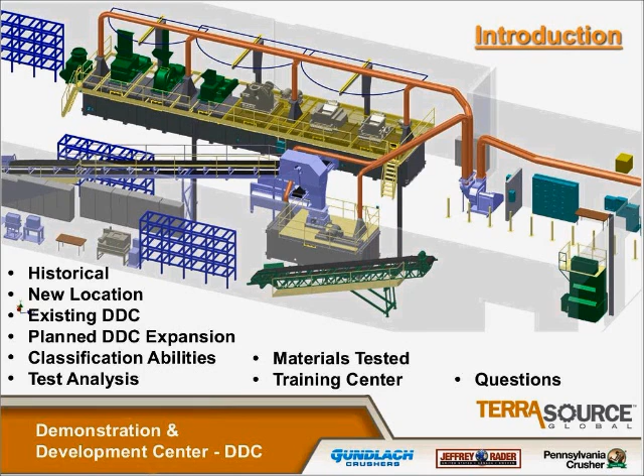We'll discuss the classification abilities of our lab and what kind of test analysis we can perform. We'll talk again a little briefly on the materials that we can test. Talk about the new training center, which is also located adjacent to the lab, and then we'll have some time for questions. So let's go ahead and begin. Got a couple of charts here that show just a real brief synopsis of the four companies, when they were organized and some of their general history.

The Jeffrey facility first started their full-scale testing lab in Columbus, Ohio in the 1920s. That lab had Hammermills and roll crushers in the single, double, and triple roll configurations. Most of the work at that time was testing coal, and that facility in Columbus was in operation until about 1995. The Woodruff plant in South Carolina was built in 1961, somewhere in that time frame, and they built a full-scale lab in the early 70s. They did extensive Hammermill testing in addition to vibrating feeders and wastewater testing. At that time, they were building a lot of wastewater equipment. Some of the parts of our existing 30 series Hammermill that we'll see shortly are from that original Columbus lab and are about 70 years old.

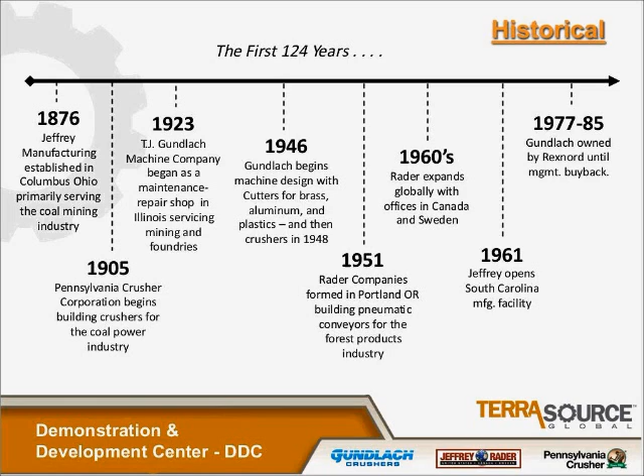Pennsylvania Crusher is also a company that's been around for a long time. They started with their lab in the 1940s. One of the lab units that they have in the Broomall office right now is a C330 Hammermill, and that was put in just shortly after World War II, and we're going to be very happy to have it join us here in Duncan next year. The Broomall lab was put into operation in about the 1960s and has done just about everything from random customer testing to full-scale runs where customers have brought in literally truckloads of material, the lab processed them, and they were put back on trucks and taken back to facilities for additional testing of that material.

On the Rader side, Rader was the youngest. Our lab was set up in the 1960s in a small warehouse in Portland, Oregon, and they acquired some larger space in the 70s. Most of the testing at Rader has been around pneumatic pipeline conveying and chip thickness screening. The facility in Portland also did some interesting things like municipal solid waste and garbage, and we also had a line at that time of rotary dryer equipment, and we had 2 full-size units on that site that could process materials.

The Rader side has also done a lot of testing at customer sites, and also done some full-scale testing, as I mentioned, at Pennsylvania Crusher. Rader has also done tests where really large amounts of material have been processed through the equipment and then hauled back to the customer sites to be further processed and refined. Rader also did a lot of on-site audits of chip thickness screening systems, where we would get samples and measure performance on a number of different parts of the system at the same time, and then use that to determine the overall system efficiency. And the point that I wanted to make, going through this short little history, is that these 4 companies all have had really extensive testing capabilities over the years.

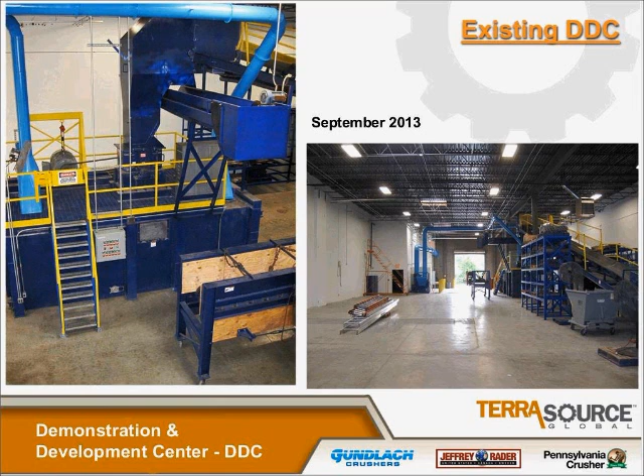Also visible in the lower right of the left picture, you can see a Jeffrey Rader scalping screen that can be fed off of a transfer conveyor. Here's another view looking at the other end of the facility. Here we can see on the far right the Jeffrey Rader vibrating feeder with its hopper, and it feeds a rather long conveyor. That's our main C1 conveyor.

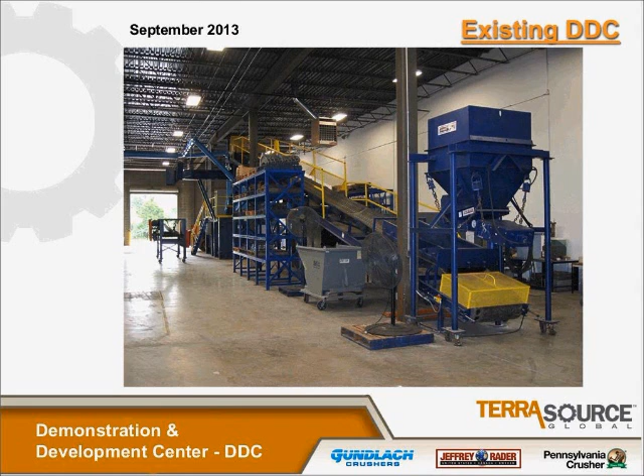You can also see some of the air piping in the discharge box with the Hammermill in the background, and we've got lots of storage racks arranged all over the place to hold all of our spare parts for testing. We have a very, very wide array of different test setups that we can put into our equipment, and we've got that all arranged on some racking. Here's a few more pictures, just showing the arrangement from some different views.

The picture on the lower left shows the C1 conveyor coming up into a transfer chute flop gate arrangement, which allows us to go between the Hammermill and another piece of equipment that we can have on the floor. Currently, the scalping screen is shown down below in that particular position.

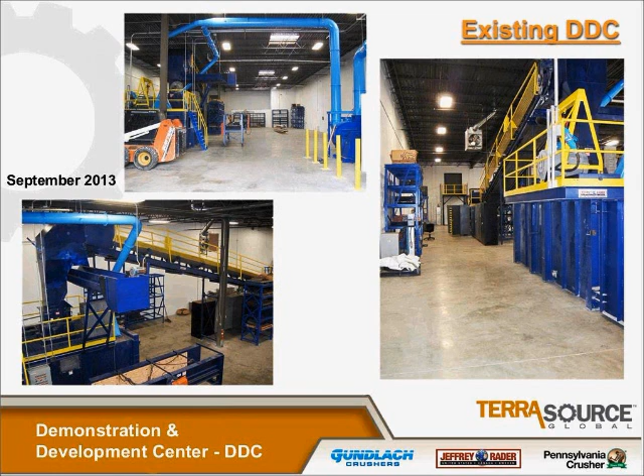On the right side, you can see the other side of that same room, and down that aisleway is where a lot of our classification equipment is. And we'll be talking more about that as we continue on here. I want to take just a real quick, brief tour through the equipment itself, and show you a little bit more in detail what we've got.

The first thing at the end of that C1 conveyor is the HP100 electromagnetic vibrating feeder. It's got its own little in-feed hopper with a metering gate on it, and we put that on a roll-around base so we can not only feed the C1 main conveyor, but we can also move it around to different parts of the shop and or the lab, and we can feed it into a barrel, or we could feed it into the bucket of our skid steer. There's lots of different arrangements and ways that we can use that particular piece of equipment.

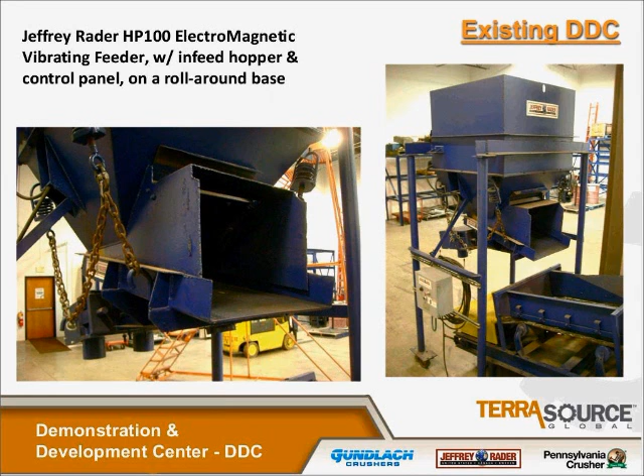The C1 belt conveyor, 30-inch wide, 60 feet long. It's driven with a VFD so that we can adjust the belt speed of that unit. And through that, we can get different in-feed rates into the Hammermill or whatever other device that we're going to go ahead and feed.

We've got an Excel spreadsheet program that allows us to quickly calculate what the rate is that we're going to run based on the number of feet that we've laid material out over the belt and the speed of that belt. And the program will give us an idea how long each test will run. Normally, we like to try to run tests that are at least 10 seconds long. That kind of allows us to have our amperage levels average out and level out a little bit, especially when we're doing the Hammermill test.

You can see in the picture in the lower center, that's a test we did recently with lignite coal, fairly large coal lumps. The test on the lower right is a recent test done on wood bark.

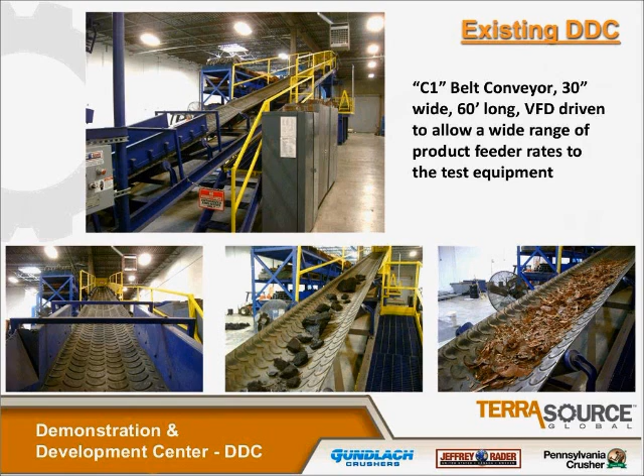Mentioned earlier about the transfer chute work and the C2 conveyor. That's a little bit better picture of that. You can see how it can either be fed to that transfer conveyor, or it can just go ahead and go on down into the Hammermill.

This C2 conveyor was something we added when we moved to Duncan. The original facility in Woodruff did not have that particular addition. But with that exception, just about everything else that we've seen here was actually installed in the Duncan facility a little less than 6 months ago. And we just recently moved it over.

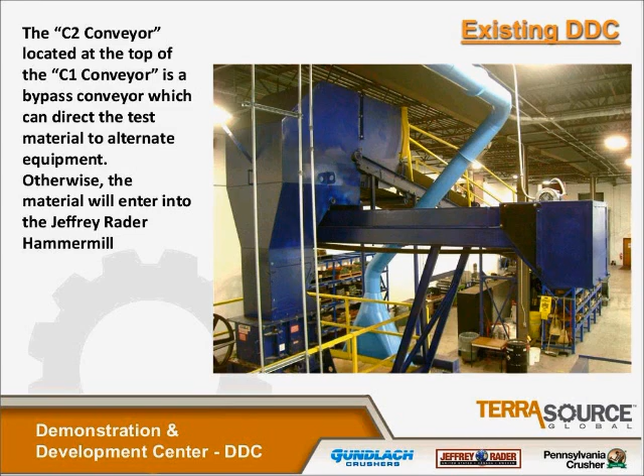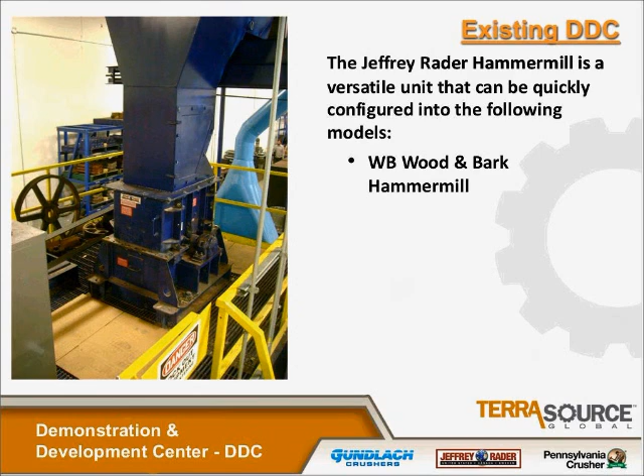Here's the Jeffrey Rader Hammermill, and this is a real versatile unit for us. We have got lots of parts for this thing where we can configure it to be just about any current production model of equipment that we make. It can become a WB bark and wood hammer mill. It can be an AB General Materials hammer mill. It can be a flex tooth crusher for coal and other easily friable materials.

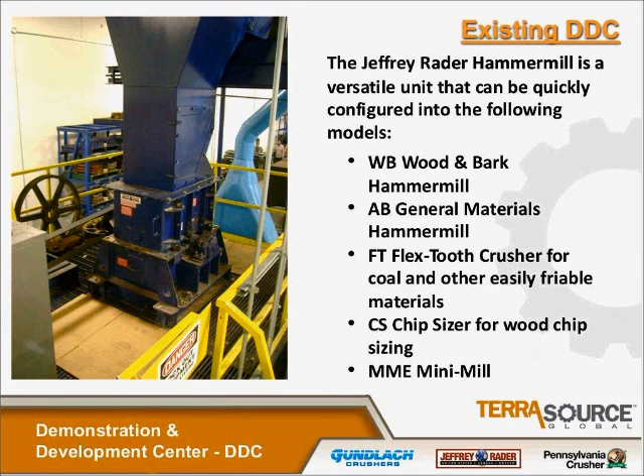It can be a chip sizer for wood and wood chip sizing. And it can also be a mini mill variant. We use those for a lot of sample work. In addition to these main categories, we have lots of parts, like I said, to be able to even do other things. It's a pretty long list. So it's a very versatile piece of equipment. We've had this hammer mill for years, and it's just a real good little workhorse.

This unit is hooked to a 125 horsepower motor, which is also connected to a VFD drive. So we can vary the speed of this unit by the VFD. We also have a full set of sheaves that goes with this hammer mill, and the idea there is that for some of the testing that we would do, we want to be able to have the full torque available to this unit at the slower speeds, which the VFD will not do.

So by adjusting the sheaves, we can get the full torque at the lower speed and be able to do those lower speed tests effectively. This little hammer mill, we can actually vary the speed anywhere pretty much between 300 and 2,400 RPM.

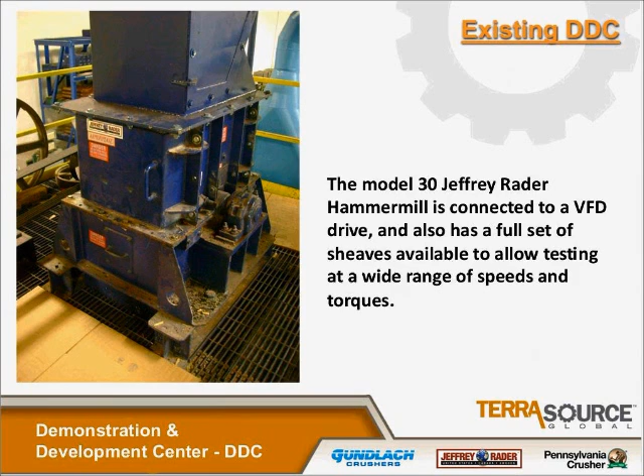The hammer mill sits on top of what we call a discharge box, and it's basically a static settling chamber. The idea here is that in many of the lab installations that we've seen and had in the past, we would have a tendency to lose a lot of finer material because there is a little bit of an airflow that's going through the hammer mill during operation. So the idea was to enclose a chamber below the hammer mill that would allow us to make sure that everything that is tested through the unit actually stays in this discharge box.

The discharge box also forms the main structure for the hammer mill to support it. There are big doors at either end that we can roll a self-dumping hopper in and out of the unit. That catches the majority of the material. The material that falls outside that can be easily swept up from the concrete floor and added to any sample that we run through the unit. And that sample can then be thoroughly mixed and a representative sample taken out of it for classification.

The air piping that we start to see in this view in the lighter blue color allows us to be able to pull a little bit of a negative vacuum out of that discharge box, with the idea being that in some configurations of the hammer mill, we may want to actually be pulling a little air through the grates to help material flow. And that's especially important when we're doing testing with really small size hole perforations in the hammer mill. It also can help us just generally keep the lab a little bit cleaner of an environment.

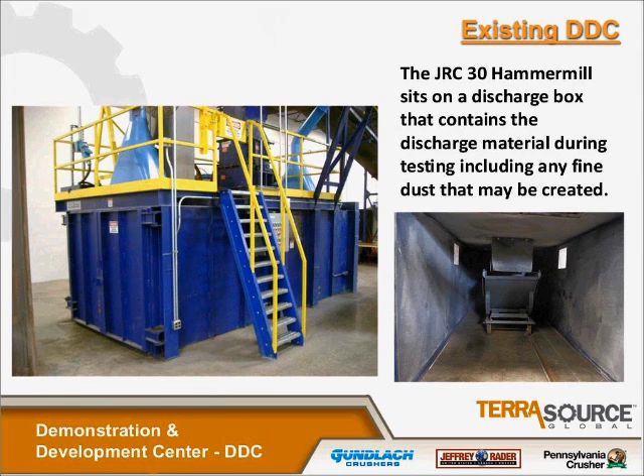We're pulling a little bit of air through the in-feed of the hammer mill as well, and reducing the amount of material that might just get kicked back up in the in-feed chute area. So we found that this kind of an arrangement seems to be very, very effective at being able to control and keep our housekeeping of our lab to a minimum.

And here's a couple of views where the air piping is a little bit more evident. You can see on the photo on the right the air handling fan that we have, the vacuum piping coming in from the top right and going down into the fan. We have another space for another pipe that we're going to see here in a minute that will be coming from the other new equipment that we're going to install in 2014.

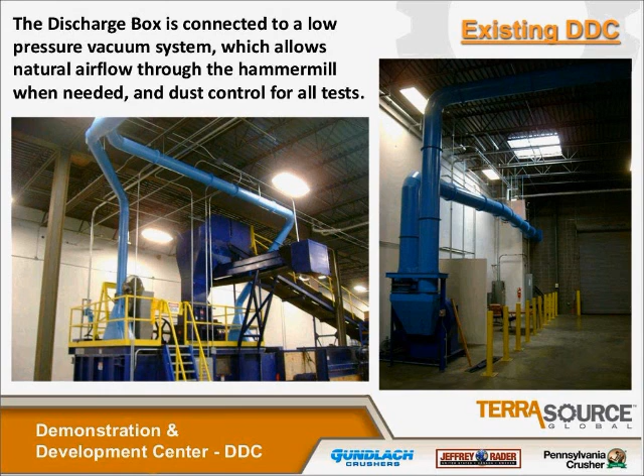As mentioned earlier, we've got a Jeffrey Rader scalping screen that's also available for testing. We use this for both customer tests and for development testing on the unit. We designed it specially so that we can adjust shaft centers and disc spacing easily on that particular unit.

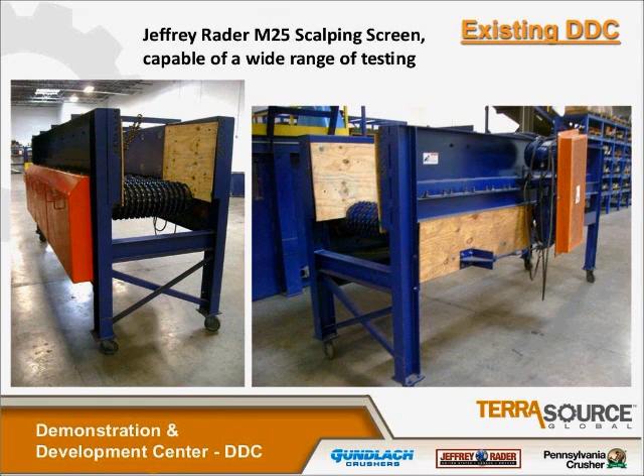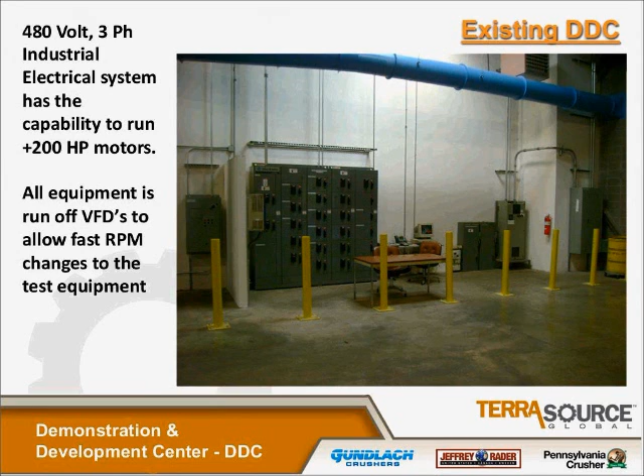To power everything, we have a fully industrial style electrical system with 480 volt three-phase power. We actually installed a new transformer in the building when we got here to make sure that we would have plenty of power to be able to run up to 200 horsepower motors, and we could probably even run over that if we had to. And again, like I mentioned, we're using VFDs for both the Hammermill and for the C1 conveyor, and that allows us to reconfigure and change between testing very quickly.

We also have a rather ancient computer that runs our data acquisition system, and for every test on the Hammermill, we currently are recording the amperage that's consumed during that test, and we can put that in the file with the test information and refer back to that at any time. We started doing this about 10 years ago on the Rader side, and we found that it's just really handy to have that data available, especially when we're handling new materials that we haven't tested before, and that helps our sales and applications department see what's really going on.

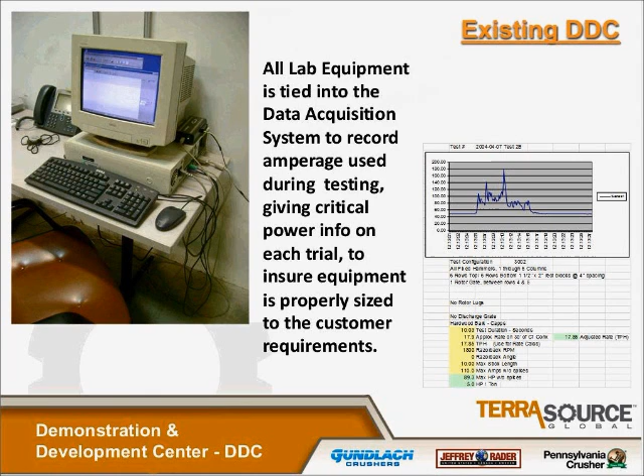The image on the right shows a test report where everything has been cataloged out, and you can see the way the amperage was run during that particular test. So that's pretty much what we've got currently here at the DDC. Now I want to show you quickly what we're planning for 2014.

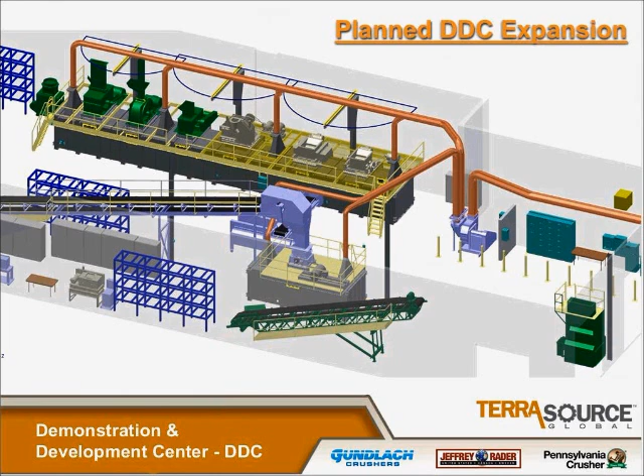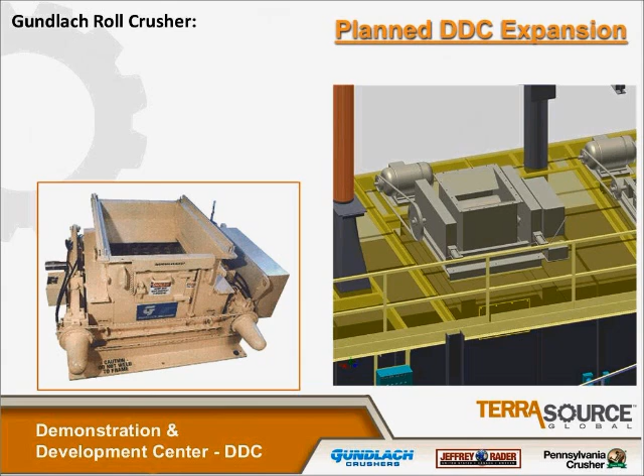We are really excited about the new additions that we're going to get from the Gundlach and Pennsylvania Crusher side of the business. What we're going to see in the next few slides is a fully funded, approved project that we are just getting started on now and hope to have installed in early 2014. The first piece of equipment that we will have available is a Gundlach roll crusher. The unit that we've got currently at our facility in Belleville, Illinois, is a very old double-stage crusher. It's served us very well over the years, but it's probably time to retire it. So we're going to build a brand new single-stage crusher, a 2030 unit for the lab.

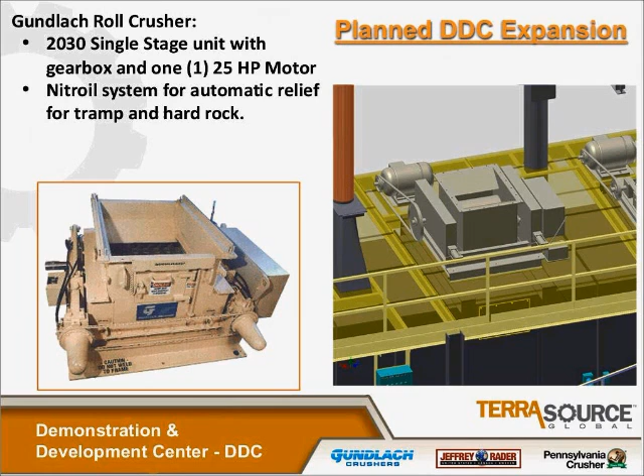It will have a 25 horsepower motor attached to it, and we'll have the standard Nitroil system attached to it, so that will provide automatic relief for tramp and rock that may get in the system. The Nitroil systems are really a very clever way to have a low-cost relief system to prevent damage to the crusher rolls.

We're fortunate that the unit we're going to build, which will look just like the picture to the left, is going to use the same profiled rolls that we already have in stock in Belleville. So when the new unit comes in, we'll already have a very large inventory of different profiles and shapes that we can run through the crusher for customer demonstrations and other research work. On the right, you can see a solid model image of the way that's going to end up looking, with the motor on top of another discharge box similar to the one that I previously described.

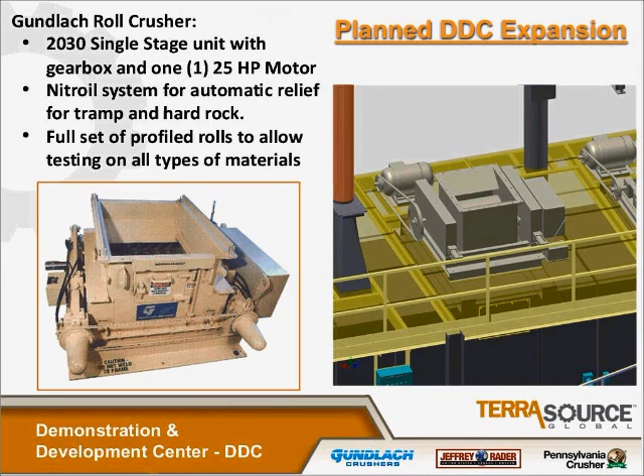And we feel that we're going to have the same advantages with housekeeping and controlled airflow through the equipment with this arrangement as we do on the equipment we've presently got installed.

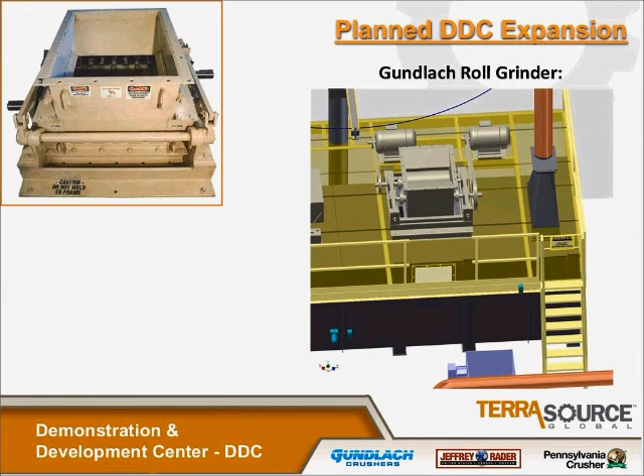We're also going to have a Gundlach roll grinder, which just so happens to be the same size unit that we were just talking about with the roll crusher. The difference with this unit is it's going to be driven by two 25 horsepower motors, and it is going to allow us to run those rolls at different speeds.

And so we actually get more of a grinding action with this particular piece of equipment than we would with the crusher, which is running both rolls at exactly the same speed with an incoming nip. The material passes without actually having a grinding action happening to it.

This unit will have an adjustable gap between the rolls, just like the crusher does, but it will be what we call a fixed gap. It won't actually be adjustable during operation, and it will not have the Nitroil system to provide tramp relief. So when we're feeding this unit, we just have to make very certain that we don't have any tramp or metal or any other non-compressibles in the flow.

And for this unit, we will have brand new rolls built with some smooth and finely profiled rolls that will allow us to do that testing on the grinding and the smaller fraction sizes that this unit is capable of.

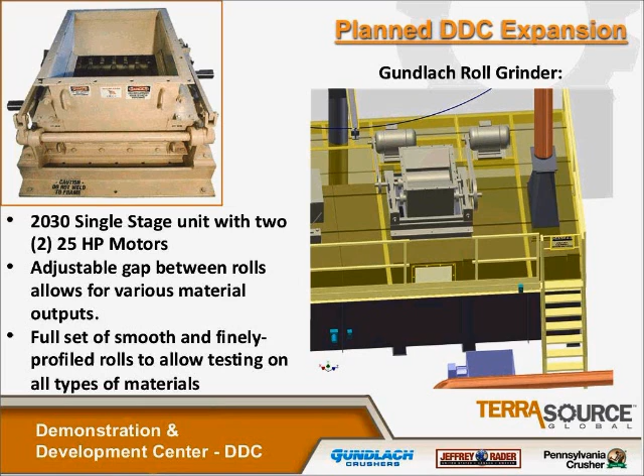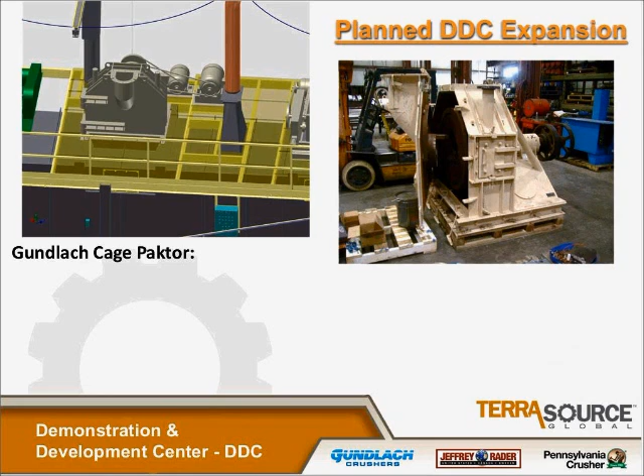We're also going to have a Gundlach Cage Paktor. The unit that's at Belleville is a rather large unit. It's actually what is designated as a Model 50B. It's a little too large for our facility here in Duncan.

So we found a unit that we had previously sold to another customer, and this unit is now back at the Belleville shop. It was actually just test run not that long ago, and it's being just cleaned up a little bit, and we're going to add the cage jack to the unit, and it will come here with the roll crushers when those are completed.

The Gundlach units use a flat blade cage design that is very efficient at using these impact flat plate surfaces to reduce the material. It just so happens that Pennsylvania Crusher also makes a cage mill design, which is very, very similar to the Gundlach unit.

And we're going to go ahead and invest and make an additional set of cages that will use a round pin design that the Pennsylvania Crusher pioneered. And so we'll basically have both of these different style cages available for testing on the unit when it's here in Duncan.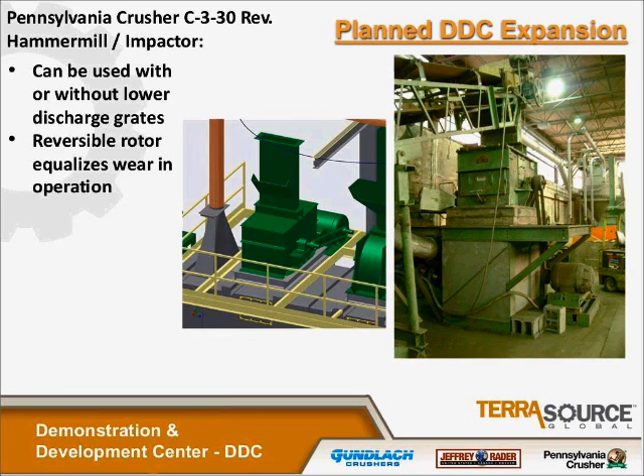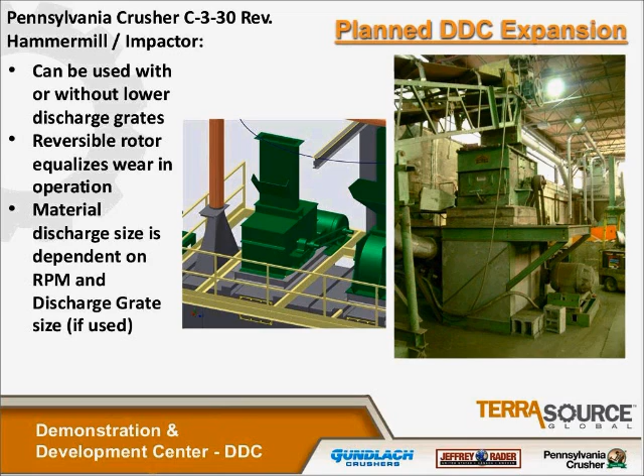The rotor in this particular unit is reversible, so you feed the material in and you can run it one direction or the other, and in normal applications, that equalizes the wear during operation. And the material size is dependent on the RPM and the discharge grate size if it is used. It was originally designed for coal, but it works very well for other easily friable materials.

Next we have the Pennsylvania Crusher CA Impactor. These impactors are largely used for secondary and tertiary crushing, and occasionally for primary work. Used a lot in cement, rock, gypsum, fertilizers, chemicals, lime, agricultural limestone. These units are capable of a fairly high reduction ratio, up to 35:1, and they're a fairly high capacity unit.

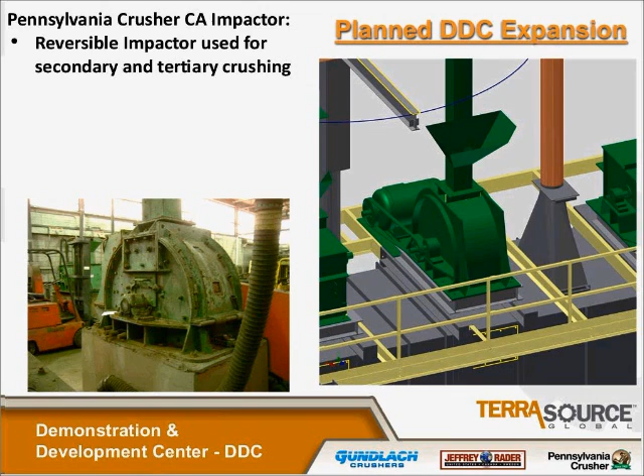Our unit is designated as a CA impactor, and I think it's got a 50 horsepower motor attached to it. This unit doesn't have any discharge screens or cages with it.

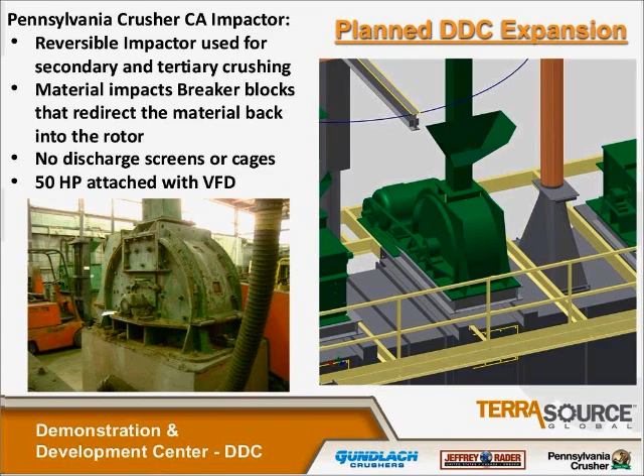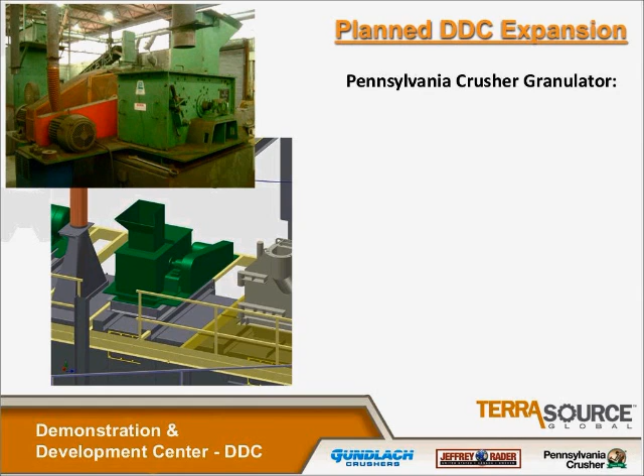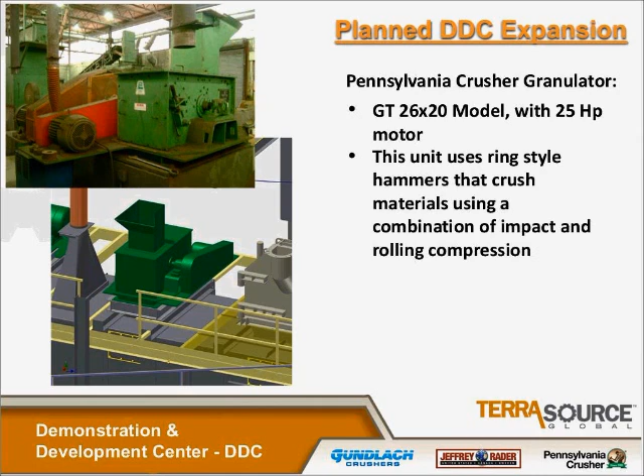Next we will have the Pennsylvania Crusher Granulator. This particular unit is going to be a GT 26x20 with a 25 horsepower motor attached. These units use a ring-style hammer that kind of uses a combination of a rolling and a crushing, a rolling or an impact type action.

Product size is determined by the screen grate openings, the speed, and changing the clearance between the hammers and the grate. These units are used a lot on coal and gypsum, salt, and other somewhat moderately hard materials, and are also capable of fairly high reduction ratios.

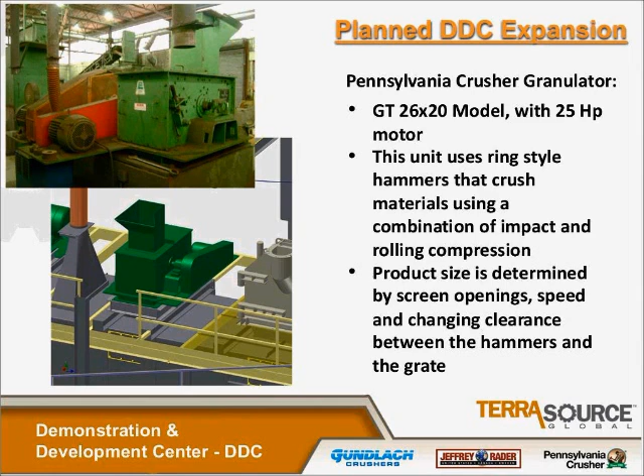We'll have a small Pennsylvania Crusher posimetric feeder that will be also available in the lab. These units are a very unique feeding device that allow you to feed materials into things like Cage-Paktors and hammer mills at a very controlled rate, and they have extremely low wear due to the fact they only have one moving part. It's a very, very simple construction.

It works very, very well, virtually maintenance-free. And we'll have this unit here in the lab for customer demonstration purposes mostly.

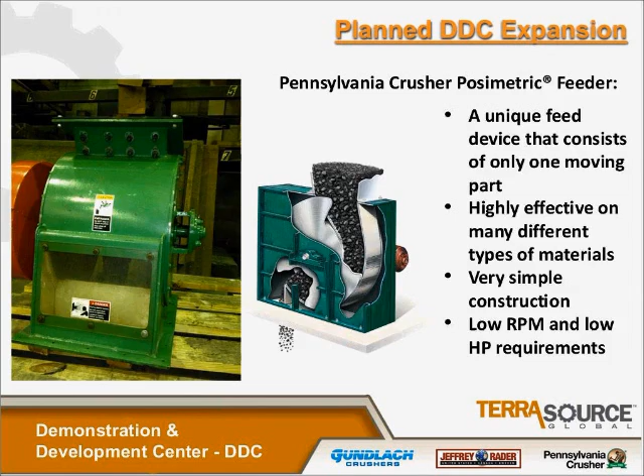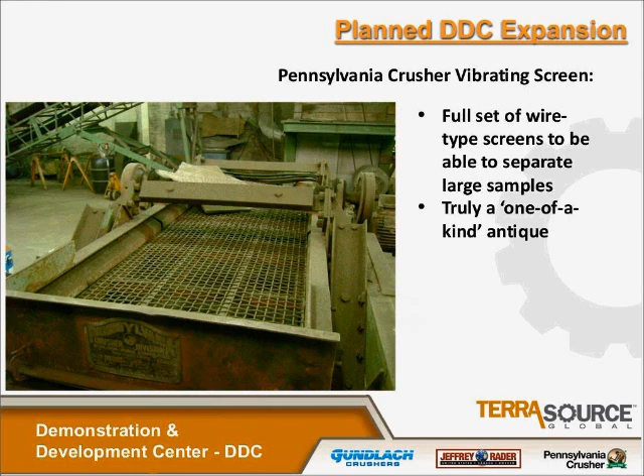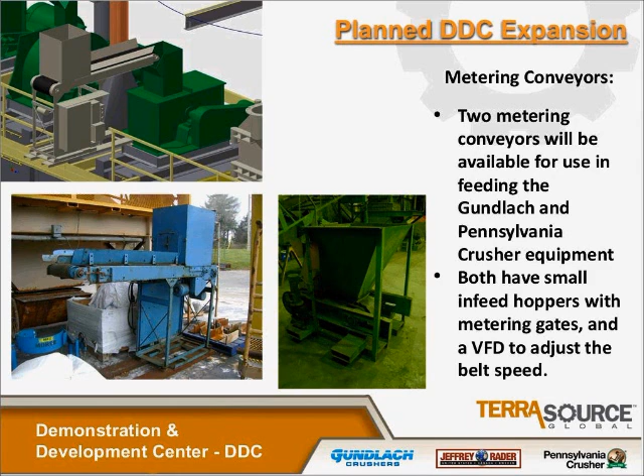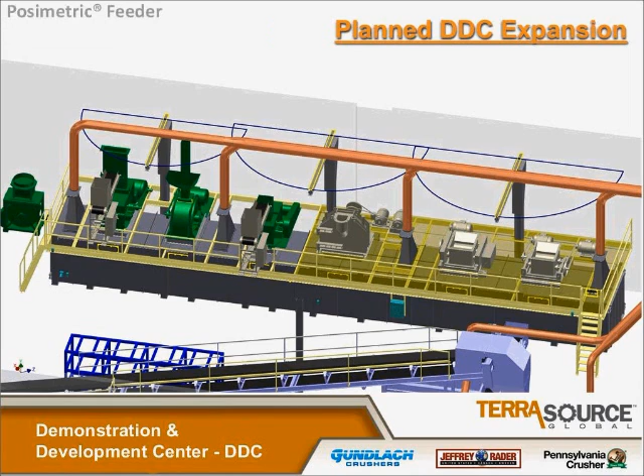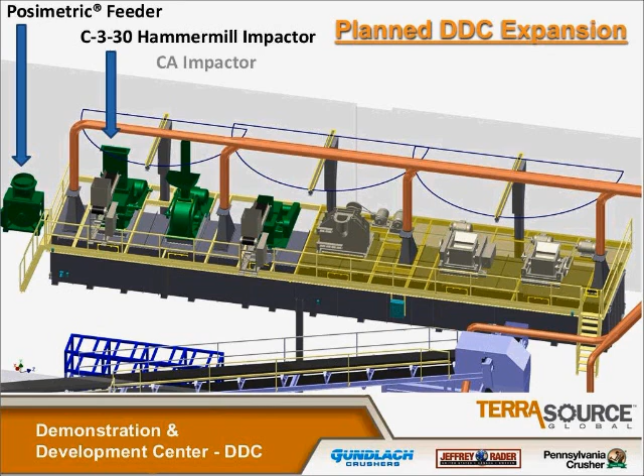So kind of in synopsis for our planned 2014 expansion, we're going to have the posimetric feeder. We're going to have the C-3-30 Hammermill impactor. Next is the CA impactor, the GT granulator, the 40B Gundlach Cage Paktor, which will also have the Pennsylvania Crusher cages available on it.

We'll have the 2030 Gundlach roll crusher and the 2030 Gundlach roll grinder. And as you can see, all of this is going to be mounted on top of a very long discharge box, settling chamber, same basic arrangement as what we already previously went through. And you can see the air piping that will also be used to pull a slight negative pressure out of that chamber. And that'll all be attached to the existing fan and system that we already have.

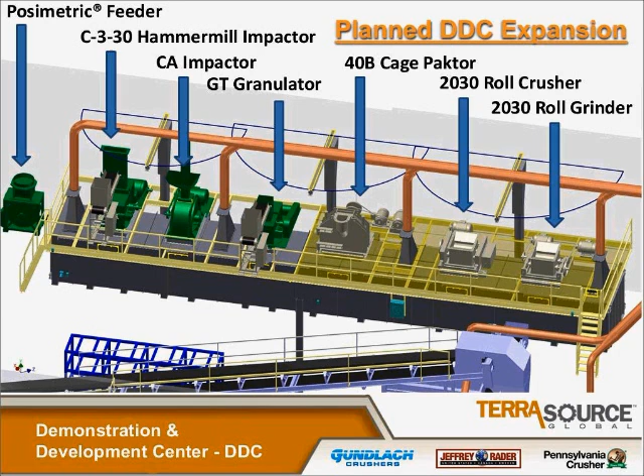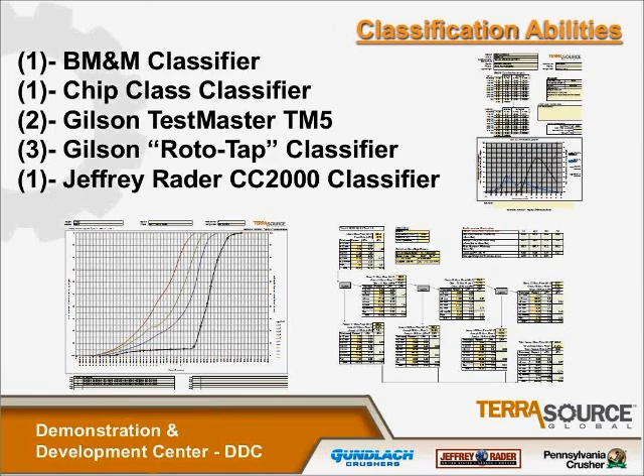Next, we're going to kind of quickly move through this. Wanted to just show very quickly some of the classification abilities that we have at the DDC. We have a BM&M classifier, which is a 2-axis horizontal shaker. And you can see we've got a variety of round hole trays for that particular unit. We use this for most all materials. It's kind of a general purpose workhorse here.

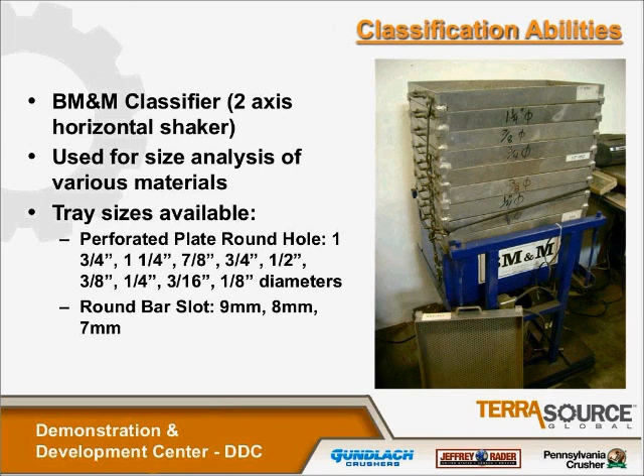In the lower portion of the picture, you can see one of the trays with kind of a small hole perforation in it. We also have a chip class classifier, and this is a 1-axis horizontal shaker, so it kind of shakes back and forth, where the other one kind of has a horizontal rotary motion. This is used a lot for wood chips, but we also use it for many other types of materials too.

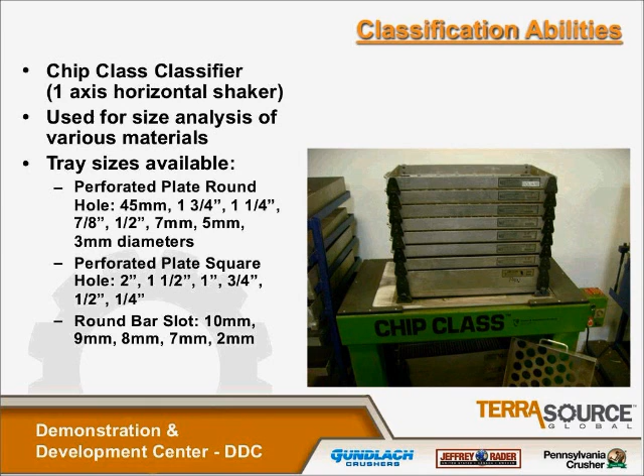And you can see on the left the different perforated plate round hole sizes we have. We also have square holes available for that unit, and we have a few round bar slots, which quite frankly don't work really very well, and we don't use them very often.

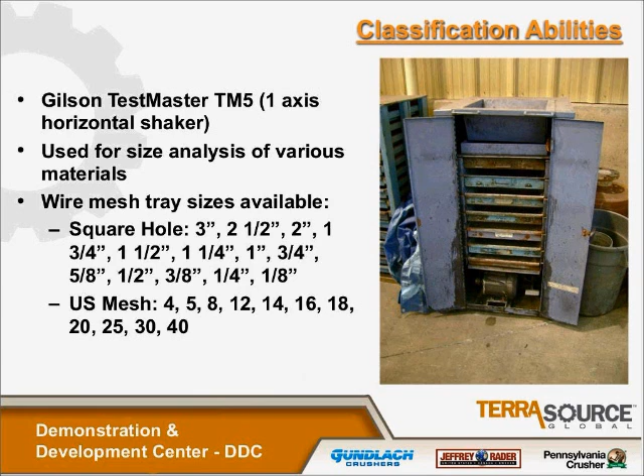From both Gundlach and Pennsylvania Crusher, each one of these locations has a Gilson Testmaster, which is another 1-axis horizontal type shaker. And these use wire mesh trays to sift the material through them. Some of the trays are inch size square holes, and then as you get into the finer sizes, we have trays in US mesh, which are also convertible over to Tyler screen sizes if we need.

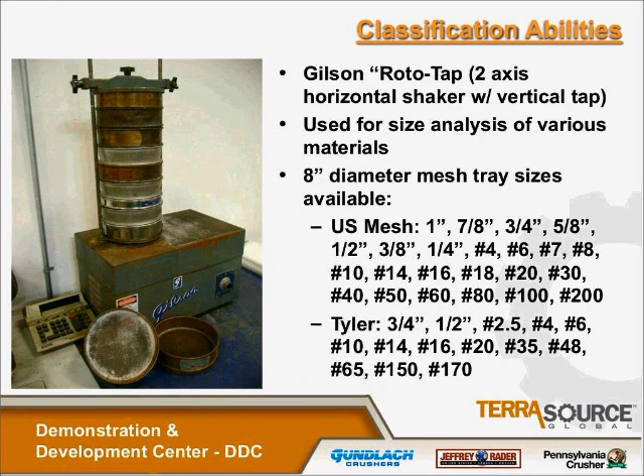And we also are going to have, from every location, 3 of these, the Gilson Rototap style horizontal shaker, which also has a vertical tapping motion to help keep the screens clear. We use these any time we have really fine materials that we're trying to get classifications on. You can see on the lower part of the screen one of the trays sitting out in front of the unit. There's another tray sitting on the table that's a little bit larger in size. And we have a pretty wide array of mesh sizes available for these units.

We also have a Jeffrey Rader CC2000 thickness classifier. This unit was developed back in the 1980s for classifying wood chips to thickness instead of size. It's a highly effective unit. It really is primarily only used on wood chips, but we could end up using it on some other materials depending on how that all goes. It's a computer-driven piece of equipment. It's got automatic scales below it, and the slots in the drum can be set up to be just about anything between 2 millimeter and 24 millimeter when you're doing your classification setup.

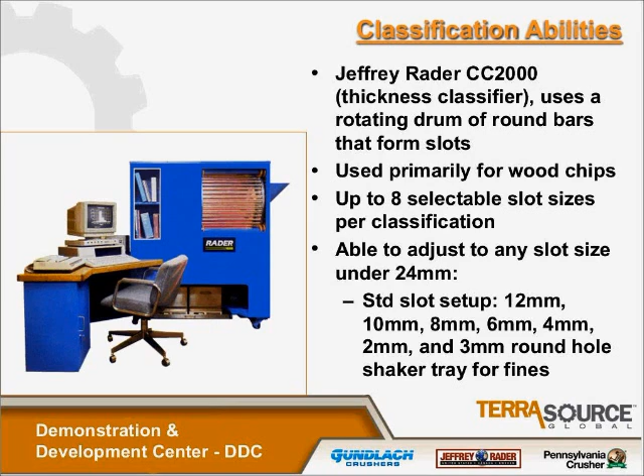We're also going to be getting some additional equipment from Pennsylvania Crusher and Gundlach. In the lower left, you can see a really large sample splitter that can be used to split apart large volumes of material. A smaller sample splitter is to the right of that. And then we'll have a full array of digital scales, floor scales, forklifts, skid steers, everything you need to be able to handle large volumes of material, split them, and get representative samples out of them so that you can classify them in these classifiers that we've just looked at.

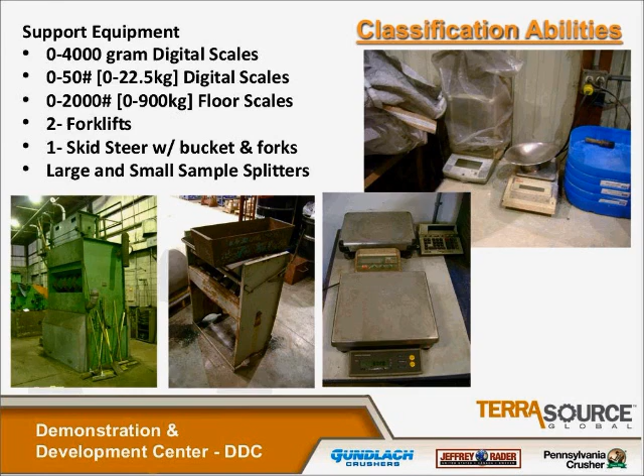Once we classify all this material, then we need to analyze it. And we can analyze it a number of different ways depending on what the customer's requirements or our own requirements are. The most commonly used analysis that we do is a retained on tray percentage, where basically we take the weight of each one of those classified trays. We gather the sample off of the top of that tray, weigh it, put that into a table and then turn it into a percentage. Another way to look at that same data would be to get a cumulative above tray percentage or a cumulative through tray percentage.

The image in the center, which may be a little small and hard to read, shows a recent classification we did where all three of those percentages are combined into one graph. And above the chart is the data that was gathered and the percentages that resulted from that data. To the left, we can see an example of a comparison report where, in the lower left, the black line represents the in-feed material, and the blue, green, and red lines represent the actual testing that was done, in this particular case, on different roll gap settings on a Gundlach roll crusher.

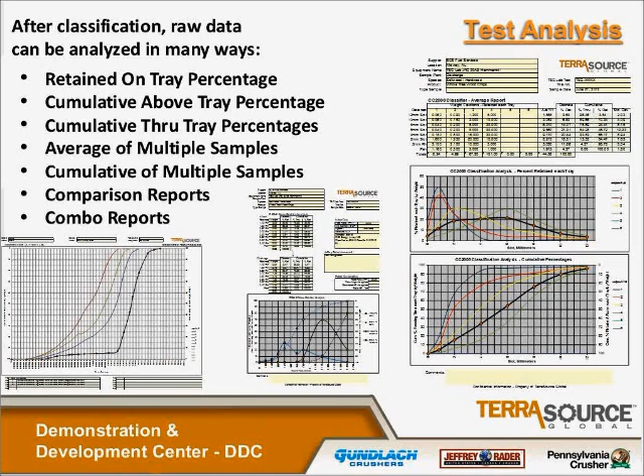Other testing that we may also be requested to do are things like a bulk density check. We do that a lot, making sure that we know approximately what our pounds per cubic foot or kilograms per cubic meter are. We do some moisture content testing, both on a bone-dry basis and also on a wet basis. We only do that on really small samples. We don't have a very large drying oven. We do have a company in the area that can do drying for us of larger samples if needed.

We have done percentage of bark in a wood sample on a weight basis, and that's just basically a painstaking process of going through and picking out all the pieces of bark out of a pile of wood and then weighing both of them and getting a percentage of it.

And we also have done percentage of over-length material in the sample. If a customer is interested, especially in the wood and bark areas, if you've got a requirement that you don't want material over a certain length, then we can go through and do a quick check, pull out all the material that's over a certain length and give you a percentage based on that.

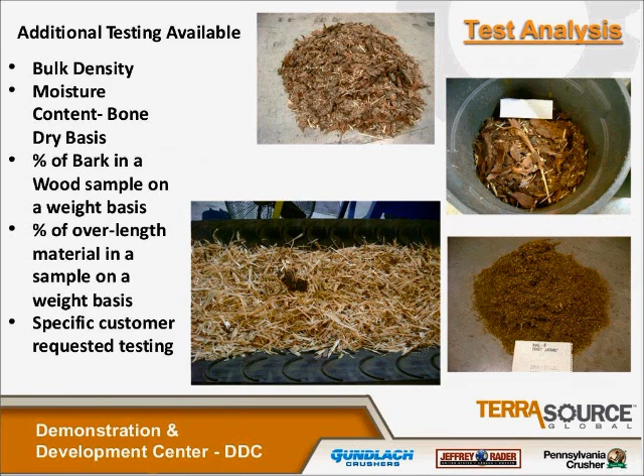And then also there's customer-specific testing, and we do this just when necessary. Right now in our DDC, we're setting up for a test that we'll do just after Thanksgiving here in the U.S., where a customer is going to pay to have us run material in a closed loop and run it through a rotary airlock Jeffrey Rader feeder for testing on a material that we've never played around with before.

So we have some extra conveyors in our boneyard, and we've set those up with some chuting and some structurals to support everything. We're going to just go ahead and do a test like that. We've done a lot of testing out in the field, as I had mentioned before. About a year and a half ago, we did a test out at a customer site where we set up a small pneumatic system and tested wood pellet conveying in a pneumatic system.

So when it gets to that kind of a thing, we can do just about anything, and that's where you have to talk to the customers. We have to really understand for sure what the requirement is that the customer wants, what we're trying to achieve, and make sure that what we test and what we do is going to be relevant for what they need.

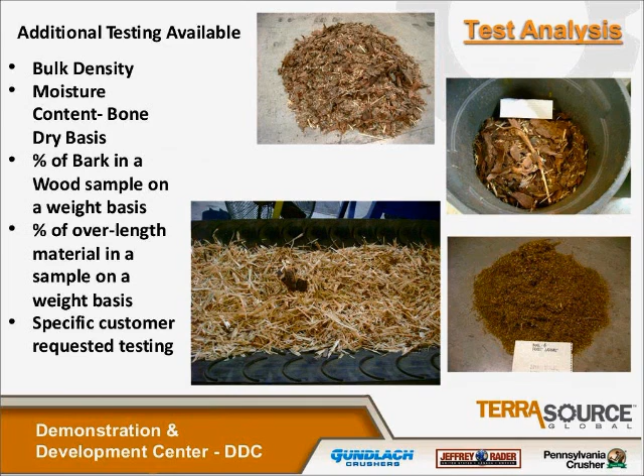In just about all cases, a customer test will generate a DDC lab report, which will outline the testing that's been done and the results that are generated. And in that report, we'll have the contact information, the test objectives, the equipment that's been used, the procedure, the test results, a test summary, any recommendations that we may have, and then all the test data, graphs, charts, everything else that would be relevant for the customer to fully understand what it is that we have done.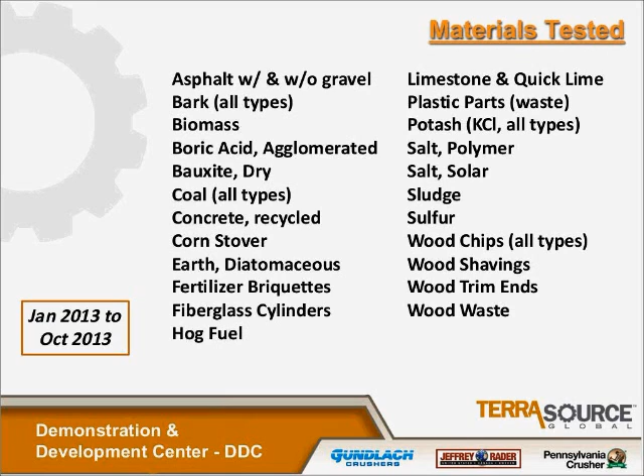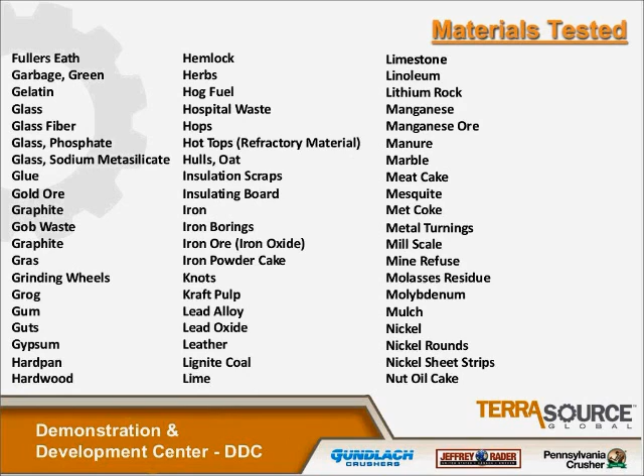Here's a quick list of some of the different materials that we've tested just this year. Even with our lab partially down here in South Carolina, we've run quite a few tests on different things. Some of these tests have also been run at Gundlach and Pennsylvania Crusher. A more complete list of all the different testing that we may have done over the years would be in these slides, which I'm going through very quickly. I know that you're not able to read all of them directly, but the point is that we have tested on lots of different products over the years, and so again, testing is no stranger to us. We anticipate and have a lot of fun whenever we get a chance to test new materials.

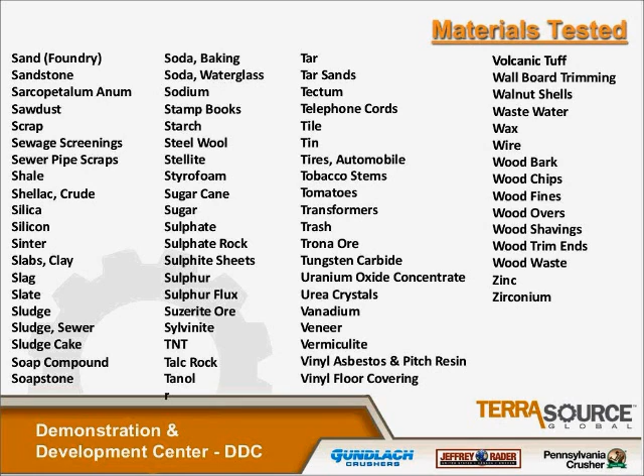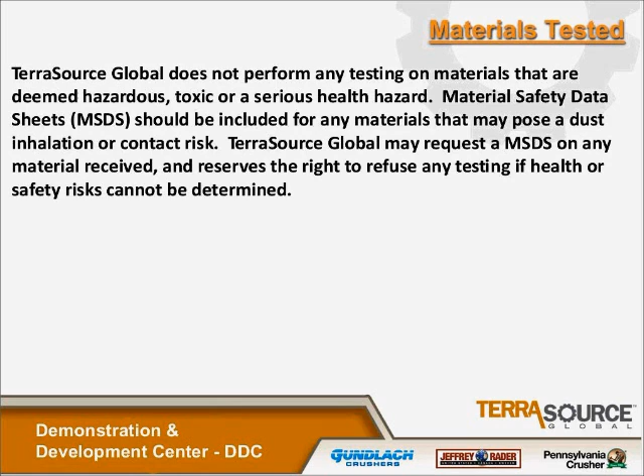There are some materials that we don't want to test on. We've pretty much given up testing anything that's hazardous, toxic, or a serious health hazard. In that short list that I ran through very quickly, you might have seen some interesting things that probably would fall in these categories, but we don't test on those anymore. Material safety data sheets, or safety data sheets as they're now known, may be requested if we're suspicious that we may have some safety issues. Certainly things that are explosive or extremely flammable, we also tend to refrain from as well.

We had a question that came in before the presentation about whether we can control moisture and temperature during a test. The short answer is that we really don't have any way to do that here. We will try to leave material in its packaging until the last minute if it has a tendency to, for instance, absorb water or be sensitive to heat or cold. We have done testing on things like frozen coal, where we'll keep it in a freezer right up until the moment that we put it on the belt and run it through the machinery. We can also try to gather it up as quickly as possible and reseal those materials in pails or buckets.

But it's very difficult for us to really maintain a temperature or humidity controlled environment where we are. Here in South Carolina, it can get very cold like it did last night, or it can get very hot like it does in the summer, and we can also have wide swings in humidity. So that's just something that we have to accept, and we try to do our best to keep materials in their original condition as long as we possibly can. When material comes into the lab, we don't unseal it until the last minute anyway.

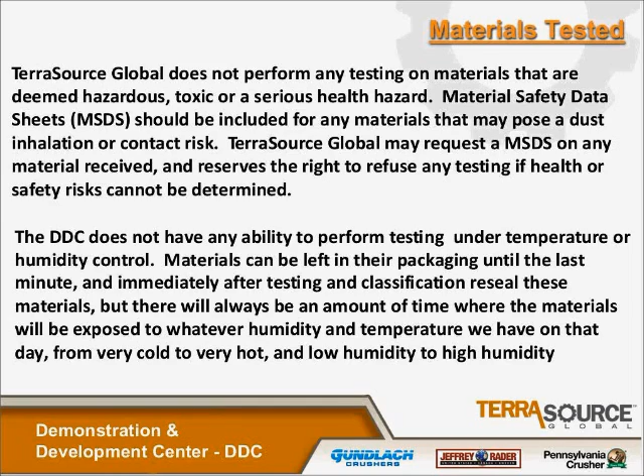We also run a considerable number of materials through our equipment here in the lab, and we just need to make sure everybody's aware that there is always a little bit of a possibility of cross-contamination. It's most evident when we run something like coal that's black and then we run something white like a salt. You'll see little specks of the previous test in there. We do everything we can to clean out everything as best we can, but that's something that we just have to accept, that we can't be 100% on that.

And also any test materials and photos and other data that we collect during the testing process are our property. Very important that when you send materials into us that they are representative of the material that we're actually going to be using if we were to offer a piece of equipment for a particular application. Sending in material that is kind of the same or maybe not even the same doesn't really help us when it comes time to actually do the application work for the equipment. So it's always important to try to send us materials for testing that are truly representative of what you want to do in the future.

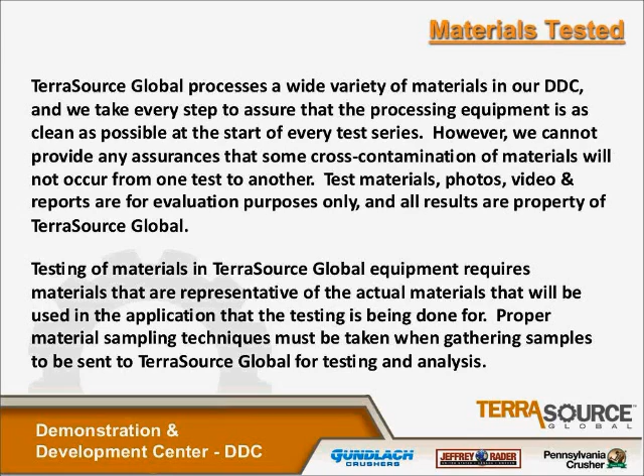To set up a trial at the DDC, we have a lab test request form. Part of this form would be filled out by the customer, and some of it would be done by us. Once you contacted us, we will send you a return material authorization, and that's requested to be shipped back with the material. So once it hits our loading dock back here, we know what it is and what test it's for, and we can kind of track it as it goes through our facility.

The lab test request form, when it's completed, that's when we will schedule the test. So the material has to arrive and the test request form has to be completed. Then we can schedule it, and the testing usually only takes 2 or 3 weeks. Usually it's even less than that. It just depends. Sometimes we're backlogged, sometimes we're not. Most all of our testing is done on a first-come, first-served basis. So as testing materials come in, we go ahead and schedule the test and put everybody in queue.

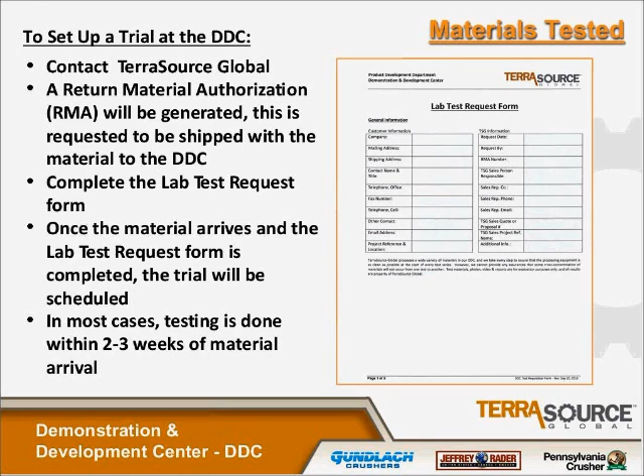Adjacent to our test lab, we also have completed recently our new training center. And this is just a really nice facility to be able to have for larger group meetings. Customers that come in to witness testing can spread out in this area. There's also a couple of private offices with phone, internet connections. So it's kind of like your home away from home when you're here. And it's also out of our normal office workflow, so it's a very private area. Nobody's going to bother you over there. It even has its own private entrance.

But yet it's immediately adjacent to the testing center. And it has the capabilities for video conferencing and PowerPoint presentations and all of that. So that's available as well.

So I want to thank everybody for attending our little virtual DDC lab tour. I did have a couple of questions that came in from Steve. He was asking if I could show examples of feeding and crushing performance relationships to horsepower, flow capacity, and/or size, consistency out with respect to variations of moisture, crusher component wear, size, consistency in, and RPM. And wow, that's a lot of things.